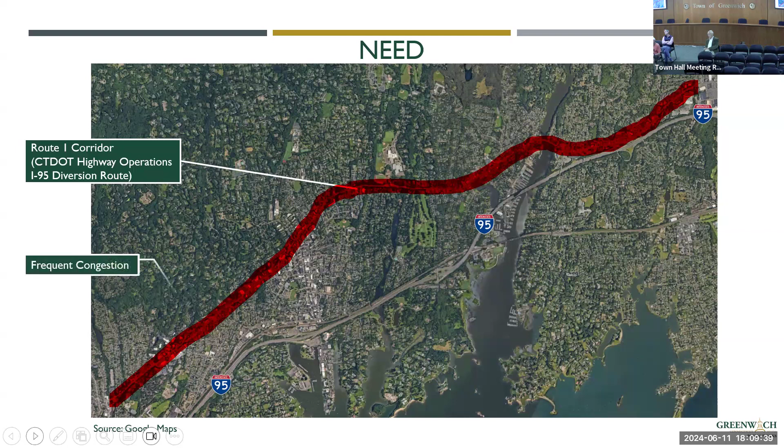Shortly after the implementation of the adaptive along the Arch Street corridor, and the return of traffic in a post-COVID era, we knew we had to pursue the same technology along Route 1.

DPW submitted a grant application for this project and was fortunate enough to be awarded. The grant is in the amount of $4 million for the purpose of improving air quality, reducing congestion, minimizing delay, and improving traffic along Route 1. This grant allows for up to 100% reimbursement for participating items. We have received reimbursements for the design costs to date and will continue to submit the reimbursement forms as the design moves along. The state receives a portion of the grant as well for their administration oversight.

Once awarded, the consultant selection process took place with scope and fee negotiations shortly following. Fuss & O'Neill was selected as the design consultant with AKRF as their subconsultant. The preliminary design was recently completed, and we will hopefully soon receive approval to move forward with the final design. As the final design progresses, an estimated construction cost will be done, which will be the basis of the construction project authorization letter, determining the future reimbursement amount.

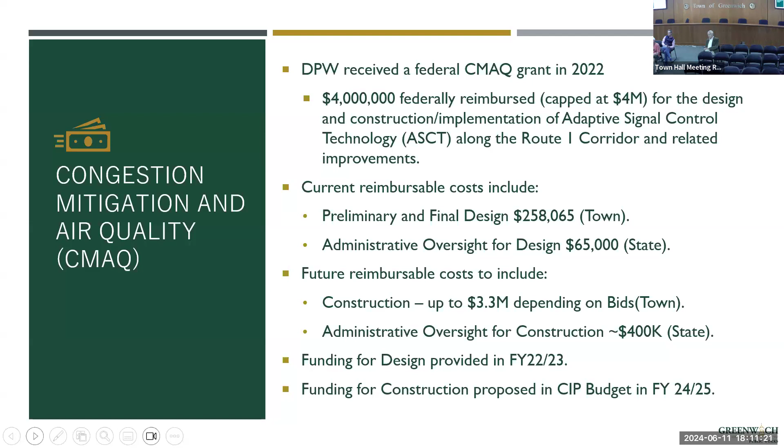The town currently divides the traffic signals on Route 1 into 4 zones. Zone 1 is West End, labeled in red. Zone 2 is Central, which is green. Zone 3 is Cos Cob, orange, and Zone 4 is East End, in blue.

The project also includes 2 traffic signals located on Field Point Road, which are interconnected with the adjacent traffic signals on Route 1. A total of 29 signalized intersections are included in the project. A new traffic signal cabinet is proposed in at least 1 location at the moment.

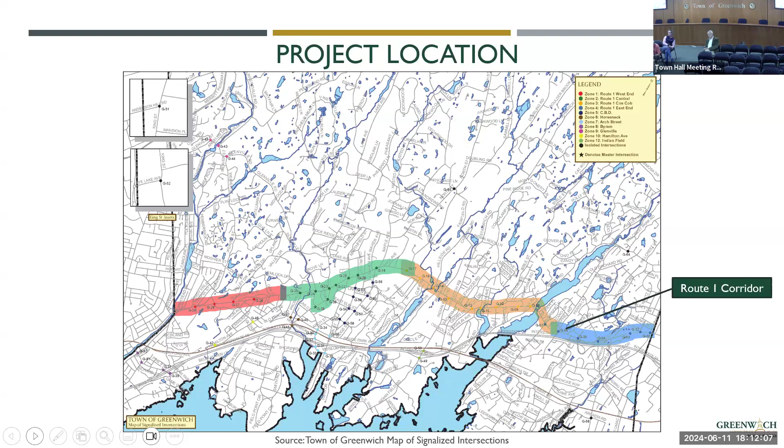The Town of Greenwich DPW Highway Division is responsible for the operation and maintenance of the traffic signal system through the existing maintenance budget. The current traffic signal configurations at almost all intersections are programmed with set timing plans depending on the time of day and exclusive pedestrian phases. These set timings cannot fully respond to unexpected traffic demands.

Once the design process commenced, traffic modeling and analysis was done to determine intersection operations during peak conditions, as well as appropriate phasing and timing for each traffic signal. Field reviews were completed to inventory all 29 traffic signals to determine if the existing traffic signal equipment and appurtenances are in a state of good repair, in compliance with federal standards, and sufficient to support adaptive signal technology.

Finally, all intersections are currently operated with 360-degree video detection technology, which will provide lane-by-lane detection necessary for the adaptive system. In consultation with the manufacturer, advanced detection is not required for adaptive; however, it is found to be beneficial for operations. Therefore, opportunities to add advanced detection, particularly between the 4 system zones currently under evaluation, will be included in the final design.

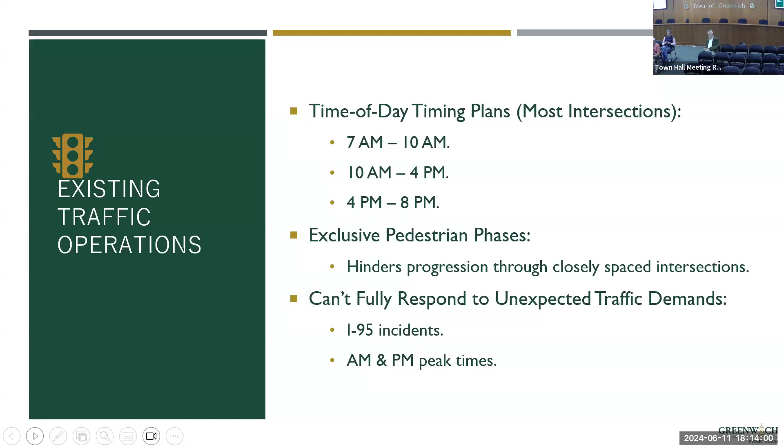This project involved the installation of new adaptive hardware and software along a corridor which includes 29 intersections, the replacement of one traffic signal cabinet, and installation of new signage where needed on Route 1 within the town of Greenwich from New York to Stamford.

Installing adaptive along this corridor is designed to create better traffic flow, provide shorter wait times at signalized intersections, and alleviate vehicle congestion. This in turn limits vehicle idling, improves roadway capacity, and decreases vehicle queue lengths, thus reducing overall vehicle emissions. Although this works for the majority of situations, there may still be times when volumes are so significant that the only way to reduce delays would be to add additional lanes to Route 1, which the town has no intent to do.

The intersections will also have improved pedestrian facilities that conform to ADA standards for accessible design and provide improved pedestrian safety features. This includes removal of outdated push buttons, installation of APS push buttons, and additional push buttons where needed. At some locations, the addition of pedestrian pedestals with pedestrian signal heads were also identified. It should be noted that the traffic signals, the green, yellow, red, are not changing.

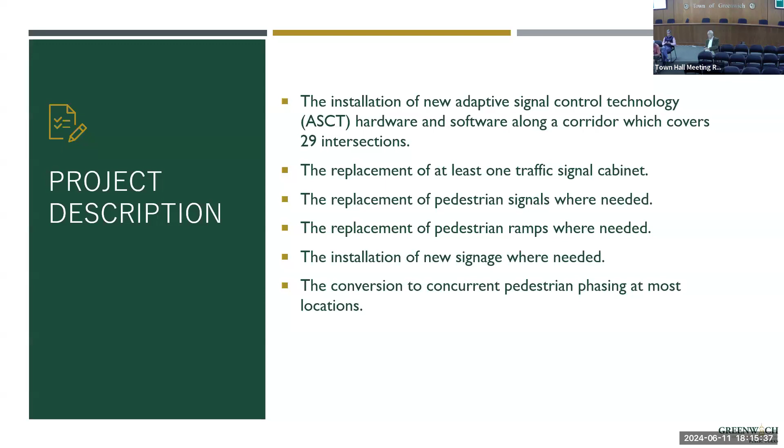When we were first introduced to Adaptive, we were excited to find out that the new Adaptive system can detect an influx of vehicles and can improve traffic congestion by instantly adjusting the timing of the traffic lights. Unlike traditional timed traffic signals, Adaptive accommodates changing traffic patterns and calculates a traffic signal timing plan based on changing traffic conditions.

The changing traffic conditions on the roadway are caused by traffic crashes, special events, road construction, and other roadway incidents in real time. Adaptive will contribute to congestion reduction by decreasing idling times along the corridor and side streets, ultimately improving traffic flow, decreasing travel time, and reducing congestion, which in turn lowers vehicle emissions. Adaptive will mitigate traffic impacts associated with incidents on I-95.

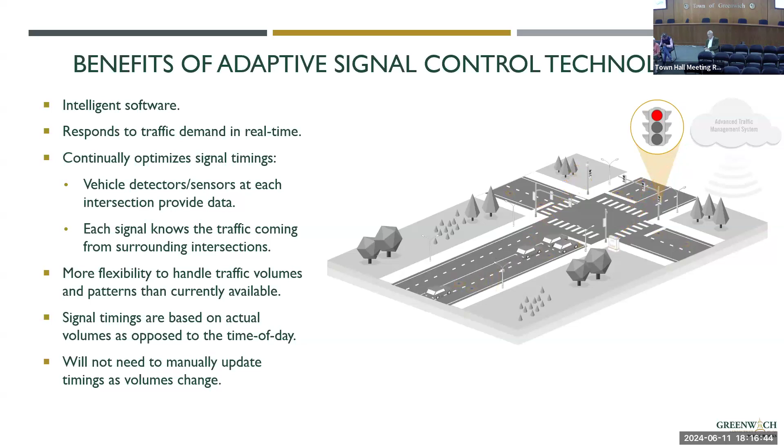While the cabinets and controllers are the brains of the system, Adaptive does all the work behind the scenes. At least one intersection will receive a new cabinet and control box. The existing cabinets will be retrofitted with the latest technology needed to run Adaptive.

Each traffic control box communicates with each other in real time through an existing fiber optic network. The existing fiber optics network communicates to the town's central system. For optimal operation of the corridor with Adaptive, the phasing at each intersection will be revised to traffic standards.

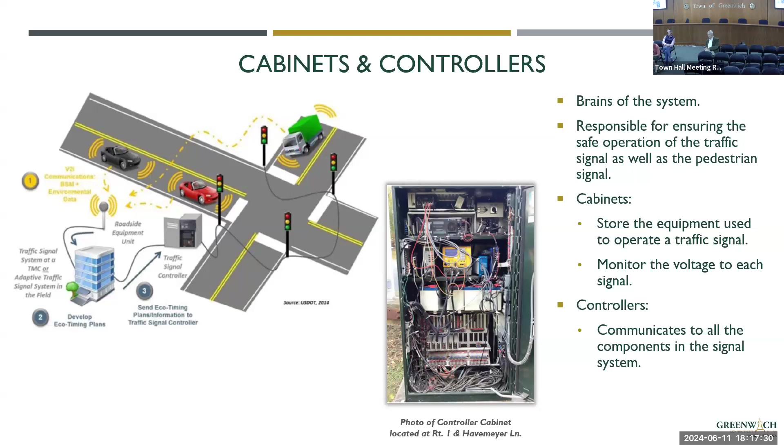Because of the Arch Street project, the town already went through the selection process of choosing a technology platform, and staff were trained to use its software.

Miovision cameras exist on the traffic signals, which serve the purpose of collecting and analyzing traffic data on directional traffic flow, vehicle delay, and lane queue length. These cameras can even detect if a pedestrian, bicyclist, or type of vehicle, whether it be a car, SUV, truck, or tractor-trailer, is traveling through the intersection.

The McCain Transparity adaptive software receives the traffic data from the controllers, and the signal timing is adjusted and improved based on the data received. Since this technology is steadily monitoring the roads, traffic flow is consistently modified depending on traffic patterns throughout the day.

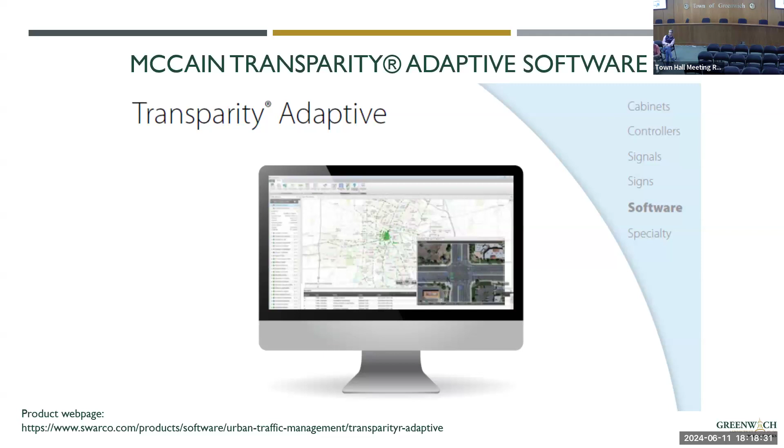Our experience to date has been positive with the adaptive implementation, as the implementation has been mostly behind the scenes, in the controller box and cloud, and not visible construction, as is the case with other projects DPW is involved with.

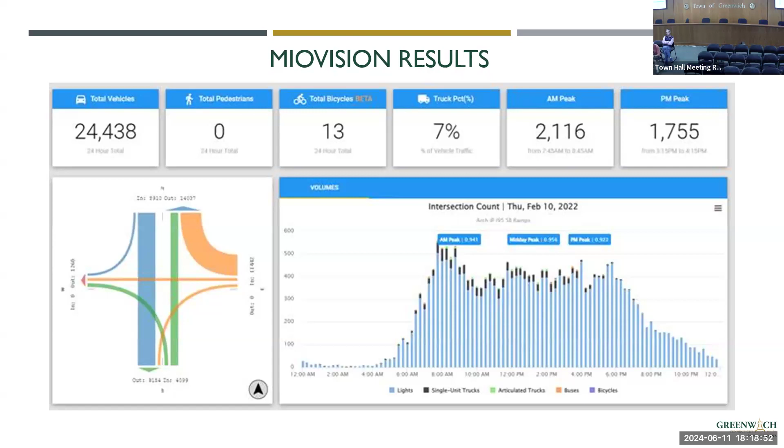The preliminary design is complete, and the final design is to be completed by spring of 2025. Construction is intended to start summer 2025.

Thank you for the opportunity to share our project with you. We are fortunate to have a great team involved in this project from Fuss & O'Neill, AKRF, and BL. The town is excited to be a leader in implementing new and advanced infrastructure that can decrease vehicle emissions and improve air quality. We credit this technology with making a positive impact on our environment today and for future generations to come.